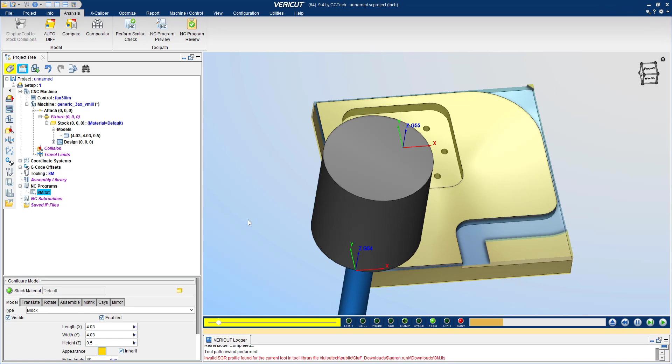Hi everyone, I'm Aaron Runk, and today what we're going to be doing is using our new Vericut software. This software is designed to take your part programs and check them to a model within your stock. So that way we can tell if our tool path and our tool setup will make a good part before we even get out to the machine.

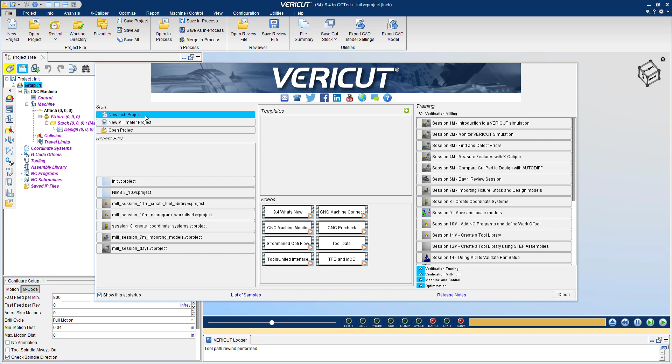So let's get started. First thing we're going to do when we open up our software is it's going to bring up this screen with some tutorials and a lot to select from. So it'll have a list of previously worked on projects, but we're going to go into new inch projects. So I'm going to click on that and it'll bring us to this blank screen where we can go from there. Now, we're going to go through and set up the majority of these settings so that we can see how our toolpath will look on our program.

So let's pay attention. On control and machine, when you get the software, you may have been given a library of control files and machine files. Well, I have a couple of them set off to the side so we can get through this quickly. I'm going to hit control and I can right click on it to open up a new one, or I can go to here to open up a new one. So I'll click down here.

When this opens up, I have put mine on the desktop. So I'm going to go to my desktop. It's on my Vericut. And then I'm going to go to my control files and my machine files. So right here, I'll click on control. I have a Fanuc 30i, and it puts it right in there. Same thing. I will right click on this one and go to open. And I'll do the same thing.

I'll go to my desktop, go to Vericut. I'll go to machine and I'll click on here. Now a second ago I double clicked on it. You can click on it once and hit open and it will do the same thing. And now I have a generic 3-axis mill. So we have that out of the way.

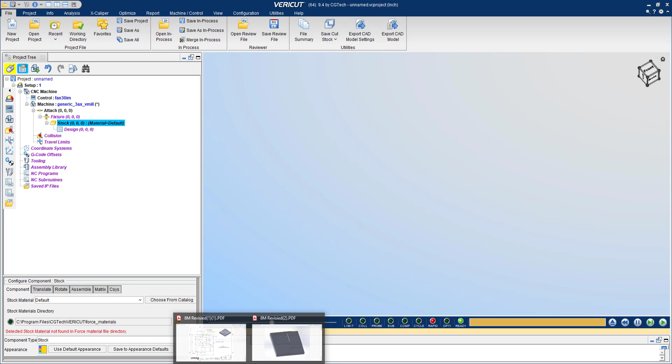I'm going to click on fixture. I'm not going to import a fixture right now. That's where I would put a vise into my simulation, but I'm just going to focus on the stock and the design. So on my stock, I'm going to have this print right here that I'm going to show you. So right here it says my material is 4 inches by 4 inch. Now I have a part program that I think will make this part correctly. That's what we're going to verify.

So I'm going to go set up my material for this right here. I'm going to go into stock. I'm going to come down here and I'm going to scroll down. I want to make sure under visibility it has both views. I'll come under model and I'm going to make a block. But right here, if you look, it's real small, so I'm going to zoom up on my block and then I'm going to give it 4 inches, tab, and then I'll give it 0.5 and I'll hit enter. I'll click off of it and you'll see that it brings in that color.

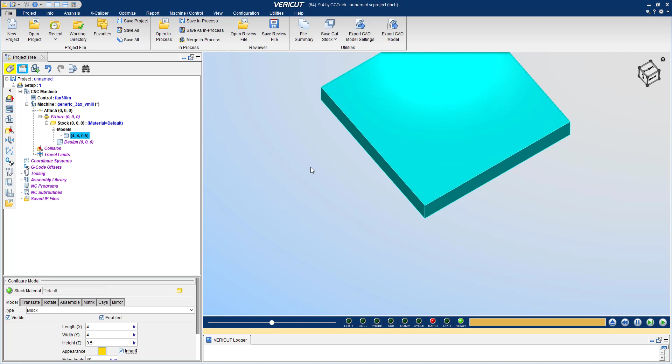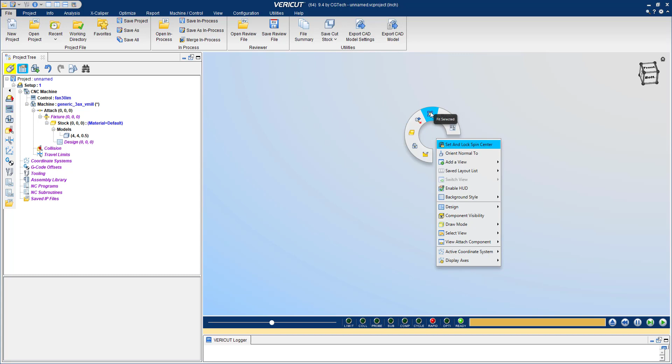Now get used to your controls. So my right click will move it around, left click and hold will rotate it. Those are your main functions right there, and of course scrolling up and down work that way as well. If you click and hold the middle mouse, it's going to scroll way up on that little view and your part's going to be lost. If that happens, we're going to right click, we're going to go to here to fit everything right there.

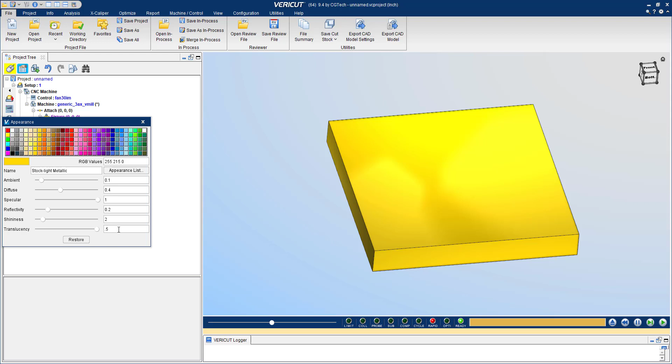Very good. So what I like to do is I like to make this translucent, so I'm going to right click on the material. I'm going to go to stock, appearance, and right here under translucent, you can scale it however you want it. I usually go 0.5 and hit enter. And then I will hit close. So from here, I've got my model brought in. I have the stock selected and so on and so forth. Now we can go further in depth on the stock material type and stuff like that. But for right now, I just want to see if my program will make a good part.

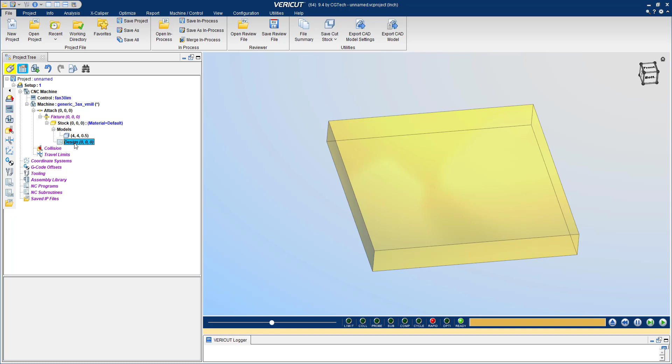So the next thing I'm going to do is I want to bring in my model. Now this model that I'm bringing in is a model that I created in SolidWorks. Now I saved it as a different type of file and I'll show you that in just a moment. So I'm going to click on design. I want to make sure it's visible in both views. It will default to invisible so you can keep bringing it in, but it won't show up. So I'm going to go to add model.

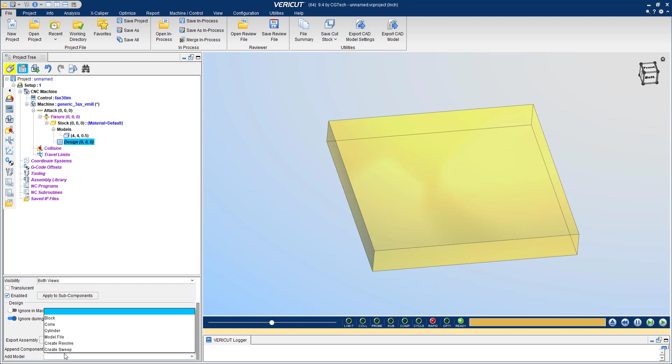I'm going to go model file, and then I'm going to go find that model file. Now I have put mine on the desktop under Vericut, and I have it in my 8M folder. Now, if you'll notice, this is a parasolid that I saved it in. Now, a lot of times, different files will work. You have to figure out which one your Vericut likes to use. So I'm going to click on that and hit OK.

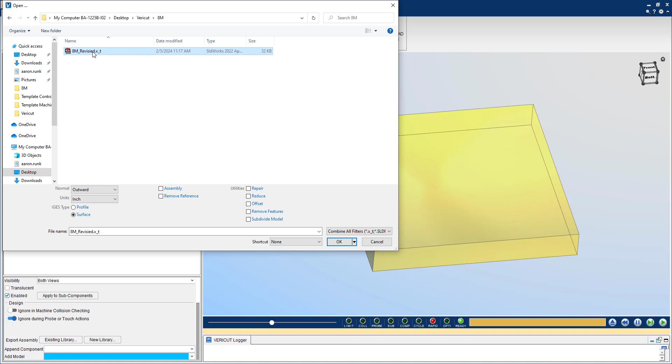And if you'll notice, it came in, but it came in at the wrong orientation. Now, this has everything to do with how you modeled it in the other software, the SolidWorks. But not to worry, we're going to rotate it, and I'll show you how. So with that highlighted, I'm going to go to Rotate. I'm going to rotate it by 90 degrees, but I'm going to figure out which way.

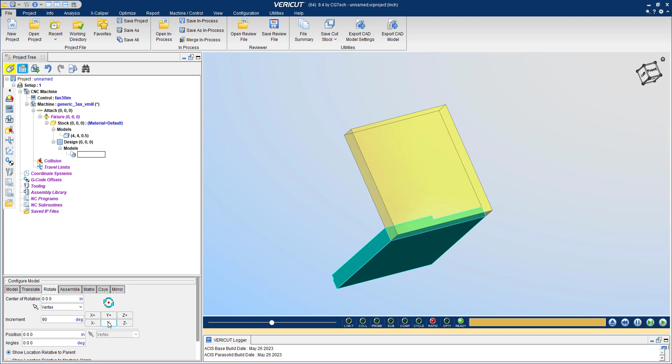So I'm going to click on Z first. That wasn't it, so I can come back and undo it. Is it going to be Y? It's not Y, so I can undo it. I'll hit X plus. That's what we're looking for. So I'm going to go ahead and leave that there.

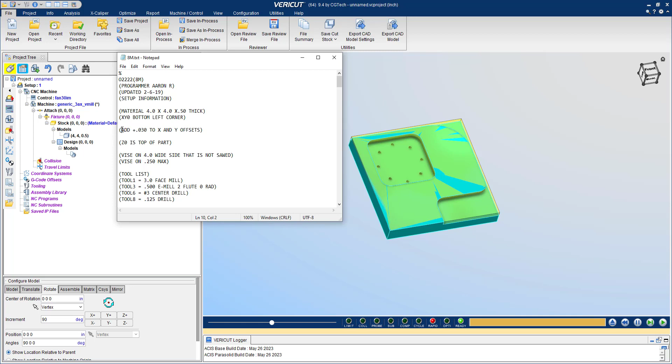So something I want to look at is I'm going to bring my program in over here, and I can see that my header says that the material is 4 inches by 4 inches by 1/2 inch thick. It tells me where the XY0 is. But what I'm looking for is this right here. This is going to affect me at this location right now. So my program is going to be shifted from the bottom left corner a positive .030 in X and in Y. So I need to move my model inside the material those distances for it to be correct.

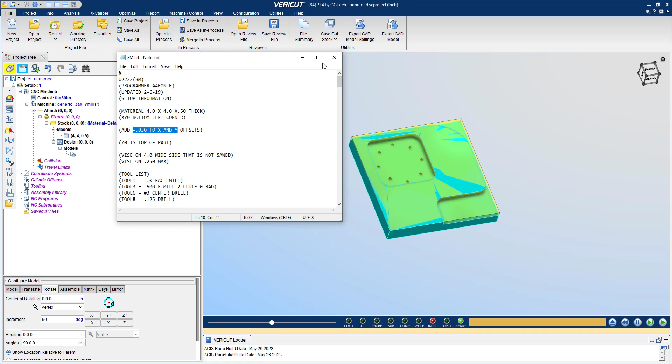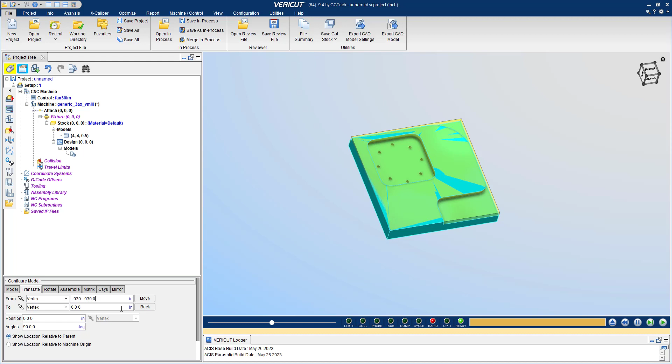So I'm going to pull this out of the way, and I'm going to go into Translate. Now, Translate is going to look a little weird. I'm going to click up here because I want to move it an incremental amount, but I'm going to move it in the negative. I'm going to hit space. I'm going to do negative again. That represents the Y, and this represents the X. I'll space again for Z. I don't want to move it in Z, so I'll simply put a 0. So when I hit move, if you watch it very carefully, you'll see that it did move.

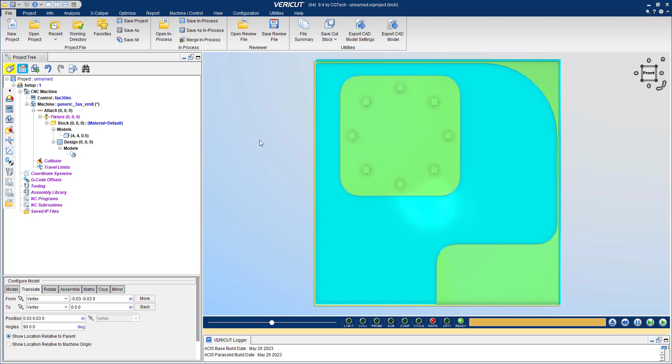Now notice the base of my part exceeds the model. So I'll show you something here in just a little bit on how to fix that. But what I'm looking for is for my part profile to be within the box, because I am only cutting the part profile in my program. So now I'm going to click off of it. I'm going to rotate it back up and center it.

The next thing I want to do is I want to start making my coordinate system. So this is all done. I will simply minimize that portion of my program. I'm going to go into my coordinate system, and I'm going to add a new one. Now this is called a Csys. You'll hear someone use that terminology. It's a coordinate system. So I'm going to add a new one, and then I'm going to go to Translate.

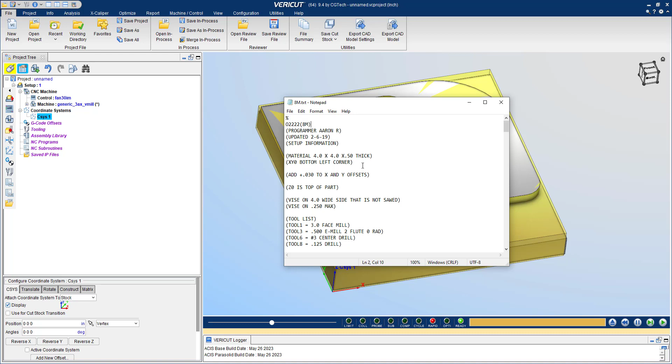It's going to default to a location on your part, but I want to put it in a certain location. I want to put it at the bottom left corner of my part, and Z0 is going to be the top of my part right here. So I'm going to translate it all at one time. So I'm going to come down here to Translate, and I'm going to position it at a vertex. I'm going to click on the arrow, and it wants me to pick it.

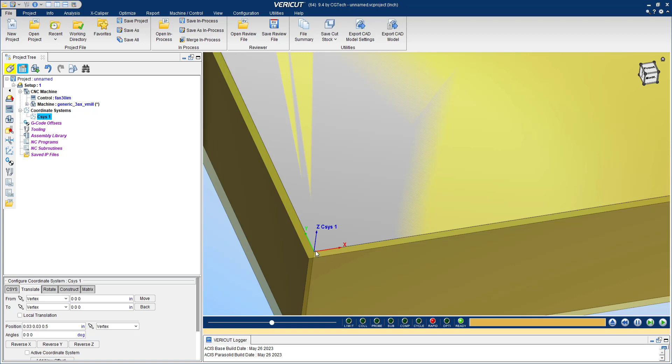Now you see my arrow jumping around. I can put it wherever, but I'm going to scroll up right here. Now I don't want to put it at the bottom left. I want to put it at the bottom left of my model. So you see I highlight it, and with it in this position I left click, and it does the rest for me. That works out very well. So now, this is where it's kind of confusing, but this has to happen. I'm going to rename it. This will help. G54.

All my programs will need a G-code offset that will align itself with the Csys that we just created. So under here, I'm going to name this G54, and I want to put my coordinate system in line with my G-code offset. So I will click on Csys number 1, and I will simply hit Add. You will see that this coordinate system is in line with Csys number 1.

But I wanted to rename it, and it didn't work. And I'll tell you why. When I go to rename, I type in G54, I must hit Enter. Once I do it, you'll see those two correct themselves.

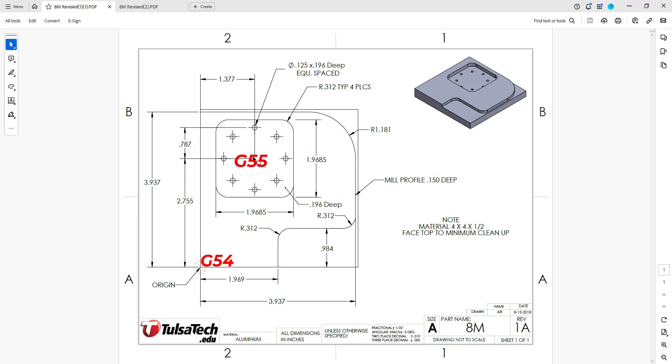So that works out really good. So we have this set up, but there's one extra step. On my part, I have an origin right here, but when I programmed my pocket, because I hand programmed it, I programmed it as if the center of my pocket was XY0. That's not a problem. So I will minimize this.

We'll go back up to my coordinate system, and I'm going to add a new one. Again, I will come down here to vertex. I'm going to put it in the same location as the other one. You'll notice that it has that 30 thousandths shift, just like the shift I made on my model. So I'm going to rename this one

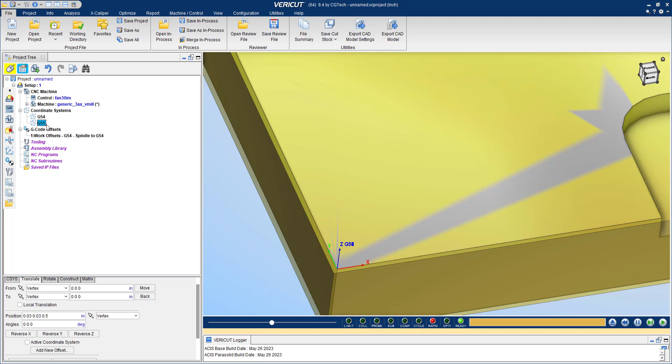G55 and hit enter. Now remember, if your program has a G55, this will work. If you have programmed your entire part using G54, I would not have to build the additional Csys. So now I have to translate this to the center of my pocket.

So if I pull up my print, you'll see that I have to move the X 1 inch 377 thousandths over. I'll have to move the Y 2 inches 755 thousandths up, and then I will translate it. Minus 1 inch 377 thousandths. I'll hit space for my Y coordinate. Minus 2 inches 755 thousandths, space, and then I'm going to put a 0 because I don't want to move

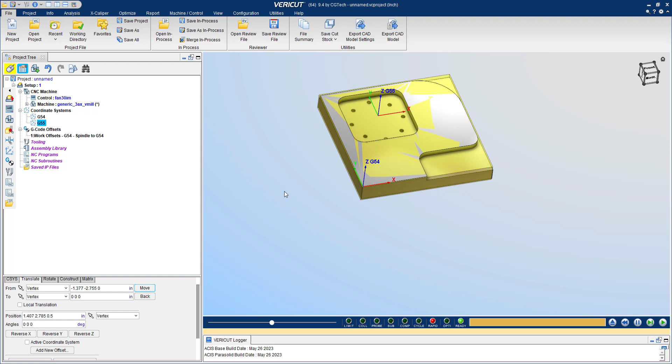it in Z. Now I'm using this as a negative because it's moving it that direction. If you do it as a positive, it will end up over here, in which case you can simply hit back and try again. So I'm going to hit move, and you can see that it moves up there.

And keep in mind, now that I've created a Csys, if my program is using a G55 work offset, I have to create a new one, and we'll call it G55. And I'll be using the G55 Csys for my location. You'll see it shows it right there. And then I'll hit add. So that all looks really good. We are actually moving pretty fast. So I'm going to go ahead and minimize my coordinate system and my G-code offsets.

Now we're going to go into our tooling. This is where we're going to need to pull up my program to see what tools I have here. So I have a 3-inch face mill, a 1/2 inch end mill with a 0 radius. I have a number 3 center drill and a 1/8 inch drill. So we're going to build these 4 tools, and if you'll notice, they're labeled 1, 3, 6, and 8.

Now what's important is in your program, what are they labeled? So this is labeled 1, and then it's labeled 2, and then my center drill is actually 3, and that's 4. So I can update it right here, no problem. 2, 3, 4. Just in case you want it for visual reference. But what's important is what the program's calling up. It's calling up G54 and then a T and an H. So I'll hit save so that it keeps my changes.

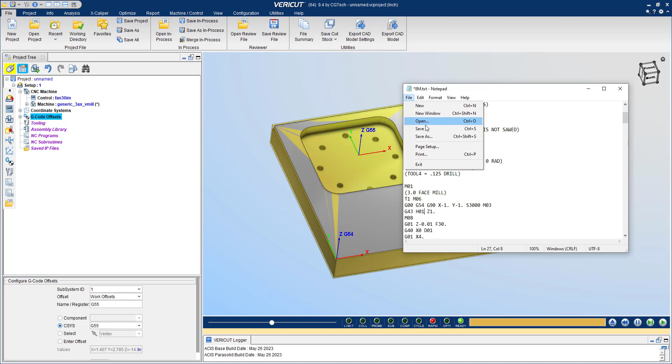And then let's go ahead and build these tools. So I'm going to go into tooling, and I'm going to hit tool library. Well, I don't have one built, so I can't load one. But if I had one built, I could simply go through and click on it. So we're going to build one, so I'm going to double click, and it's going to bring up my tool manager. So in here we have a lot of options to do things, but we don't want to spend a lot of time. We're trying to get this done.

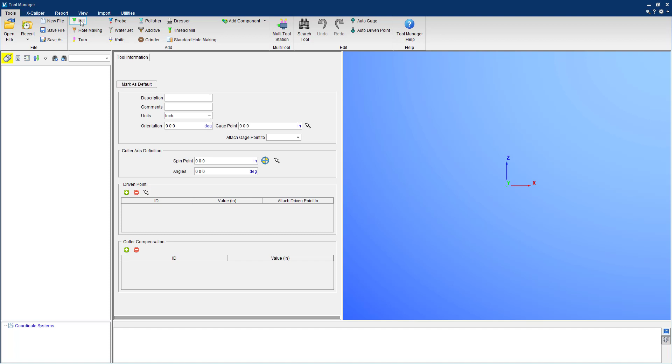So I'm going to go into mill because I want to make a milling tool. And then I'm going to go through and simply add some variables. So we said our first tool is going to be a 3-inch face mill. And I'm going to make the shank 2 inches just so it looks the same size as my holder. And then there's no radius on the end of it. So therefore I won't use this as anything else except for a flat bottom end mill.

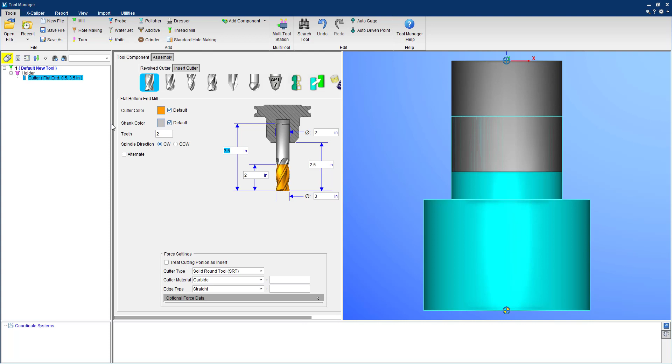But if I had a radius, I could click on it. If I had a tapered ball nose or if I had a bull nose, I could simply go through and add all these functions. So right here, that looks good. I have carbide inserts, so I'll leave this as carbide. When I click off of it, it will keep my settings.

So I'm going to come up here to default, and I'm going to rename this a 3-inch face mill. And the thing that's important is the first tool you make, the 1 and the driven point 1 will match. However, when we make our next tool, we need to make sure that those tools match, or else it will not work correctly in our simulation.

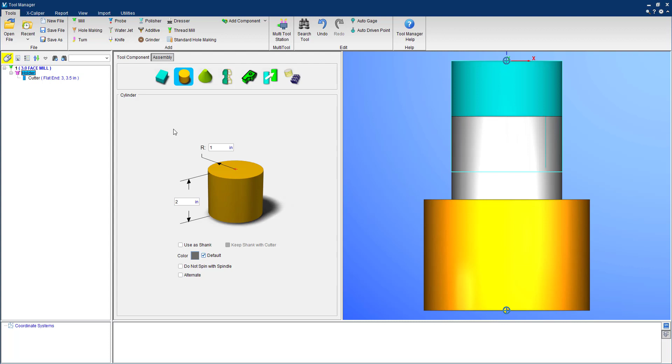Now, holder, you have the options of making just a generic holder, or if you have a DXF file of a holder that you can import, you can bring that in as well, or you can simply build one in the graphics window. Well, we're not going to go that far right now. We're just going to simply minimize tool number 1 because we're happy with what we have.

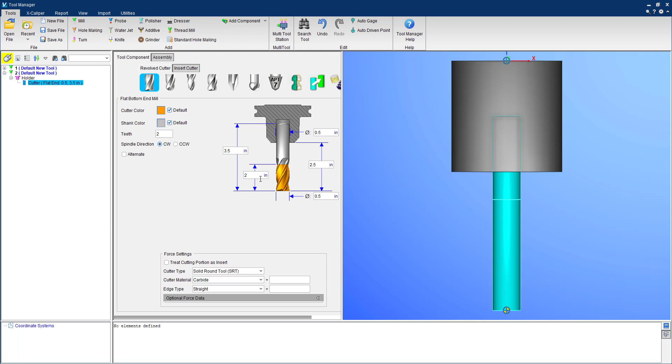So my next tool, as you can see, is a 1/2 inch end mill. So I'm going to click mill. The default setting was a 1/2 inch, and it has a 0 radius. So this actually came in exactly how we needed it. So I'll simply click on here and see how it says default tool. We notice it didn't take in my value because I forgot to hit enter. So 3 inches, face mill, and I have to hit enter.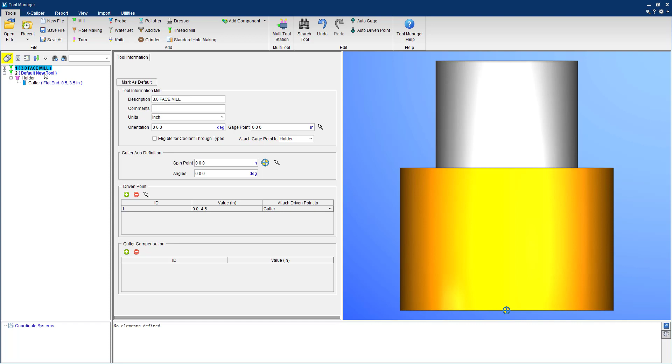So we'll do the same thing right here. I will come up to here and it will be a 1/2 inch high-speed steel end mill, and I'll hit enter. But notice my first tool was carbide. This one's going to be high-speed steel. So I'll come back to my cutter. I will come down here to the cutter material and change to high-speed steel, and I will hit enter.

So before we close this out, remember I want my 2 and my ID to match. So think of it as this is the T number, this is the H number. I want them to match. So I'm going to click right here. I'll click one more time, 2, enter. And then that way it will look correctly in my simulation.

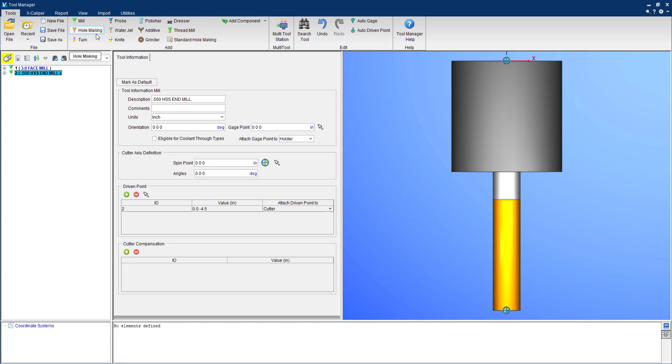The next thing I want to do is I want to make a hole. So I'm going to make a center drill using hole making. The cutter will come up and it will have these options for a drill, a reamer, a center drill, or a tap. Well, we're going to use a center drill, and I believe the default size is a number 4, but my hole diameter is an 1/8, so I can't do that. So a number 3 center drill has an 1/8 inch diameter, so I'll type that in and push enter. And you'll notice that my graphics changed.

So as well on the diameter, I believe it's a 3/8 diameter, so I simply type it in and hit enter. And if you need to extend this tool out of the holder or retract it, you can control it with these graphics right here. Now again, this is a center drill, which is high-speed steel. I'm going to go to cutter material and select high-speed steel.

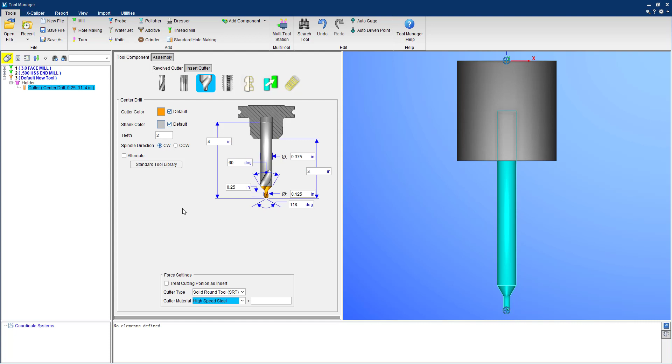I'll come back up to my holder. I'll type in number 3 center drill and hit enter, and then my ID number has to match my tool number. So 3, enter, and then I'll simply close it. We're almost done. We have one more tool to make.

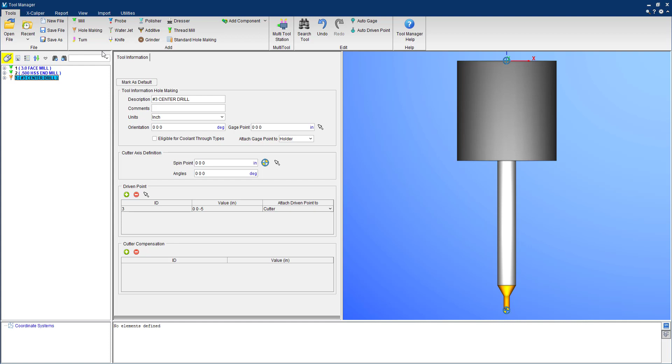I'll go into hole making. I will come up here to drill. I'm going to type in an 1/8 of an inch and hit enter, and I'll just leave it just like that. It's really long, but it's okay. So I'll come back up to my cutter material, high-speed steel. If you have a carbide drill, you can just leave it as carbide or a ceramic or cobalt.

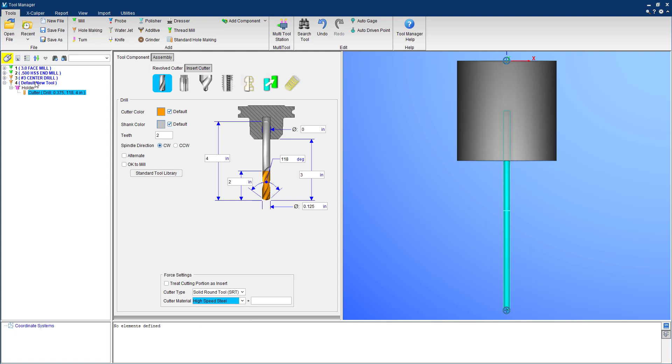So I'll come up here to description, and we're going to call this an 1/8 inch drill, and I'll hit enter, and I want my 4 to match my ID. So I'll click down here and type in 4 and enter. So this is really good. This is all done. Now before I close this, I need to save it so that if my software decides to crash, I know where that's at.

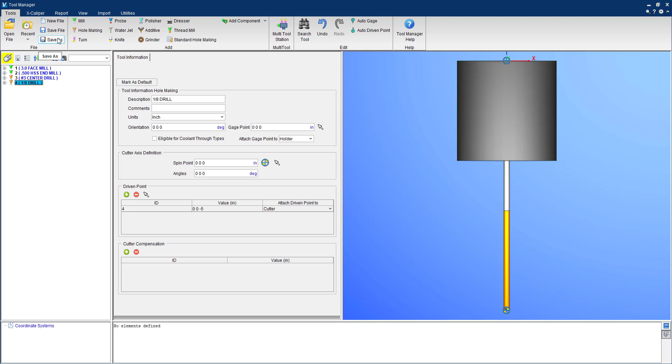So I'm just going to do a generic save. I'm just going to save under downloads. It saves it as a TLS, and I'll call it 8M. And then I'll just click over here and hit save. So this works out good. So I'm going to hit exit. And now I've got my tooling. Now that's going to take you the majority of the time, is just building your tools.

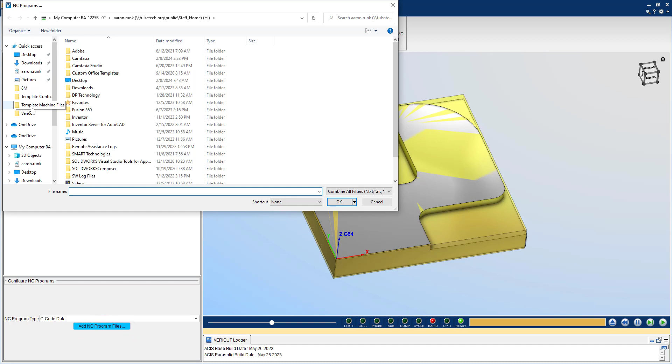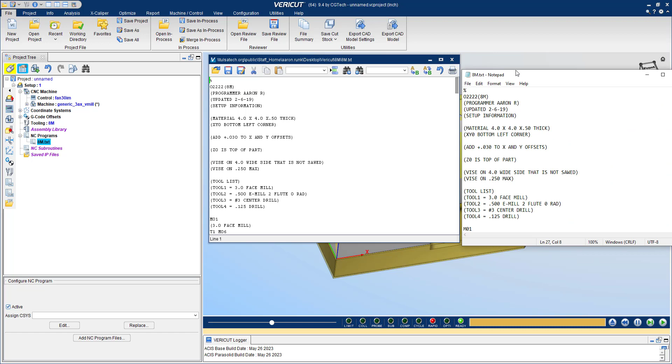So here's where it gets pretty easy. All I need is my program. So on my program, I'm going to go to add program files. Now mine is going to be under Vericut, under the 8M, under that text document. So this text document that we're grabbing is this one right here. So I'll hit OK. And it came in right there. So if I double click, you'll see that everything did come in just as it shows here. So I'm going to exit that.

Now right here, if I hit play, it's going to go really fast. So I'm going to slow it down just a little bit, and it will still go pretty fast. And I'm going to hit play. Now is where we want to see if our program is going to work. So I'll hit play.

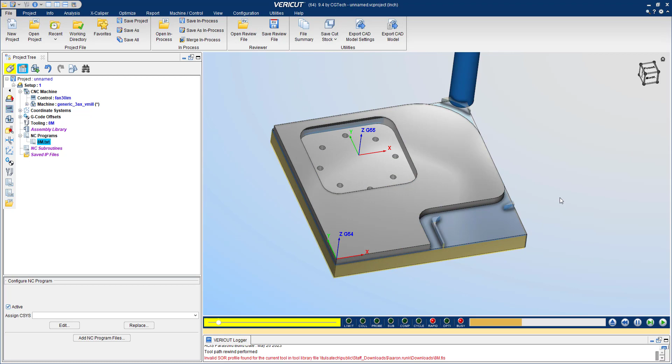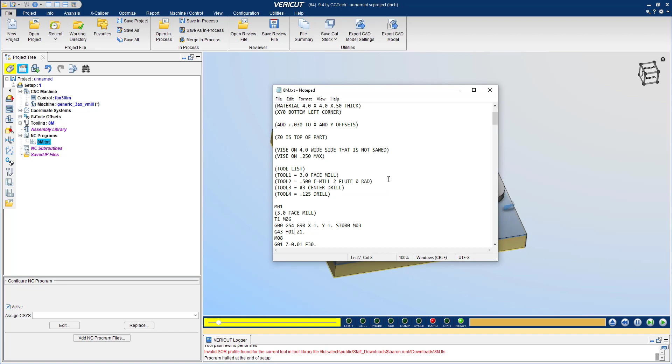And I see some things already that don't look right. So I have all these islands right here. Now my program, if you'll notice, uses cutter comp. So I have to make sure that my software over here is set up to use cutter comp. So I'm going to hit eject real quick. I do want to reset the simulation.

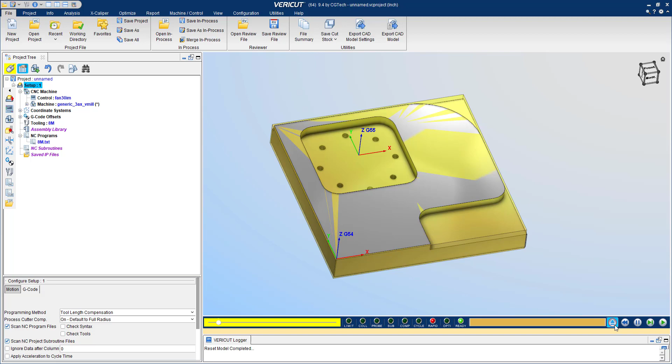I'm going to go under setup. Under G code, it says cutter comp is off. So I'm going to click the drop down menu and go to default to full radius, and I will click OK. Because we hand programmed it, we have our cutter comp. This will allow cutter comp to work. I will simply hit play again, or I like to hit eject just because. I'm going to hit play again and see what it does.

Very cool. So it took into consideration what my cutter comp was. Looking at this, it looks to be right. It's cutting on the front of my part, it's cutting on the side of my part, and that's the reason why I put the 30 thousandths in there. So if you look right here, this is what my part should look like when it's done. Now if I had not shifted my 30 thousandths, when I run this on the machine it would look like this. It would not have any cleanup. So I definitely want this to show, which is exactly what it shows right here.

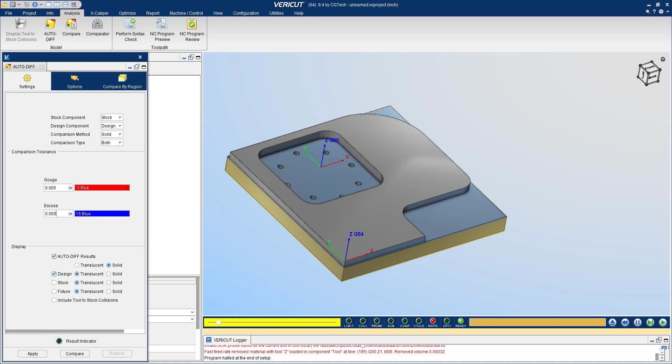So that's good. Now the last thing I've got to do to make sure that nothing is out of tolerance to the model is I'm going to go up here, then come up to my auto diff, and it's going to give me my options. So right now, if it is gouging into the model by more than 5 thousandths, it will show up red. If it has excess material more than 5 thousandths, it will show up blue. With the majority of my tolerances being plus or minus 5, I like to keep it just a little bit lower, but if we needed to, we could simply change it right there and hit apply. Now I'm going to hit compare.

Now if you notice, I've got some weird things going on right here. When I look at this, I've got red on the top, red on the side, red on the top of the part, and at the bottom of my holes. So this is why it's always good to run in Vericut before we take it out to the machine, because it may look good in a 2.5D simulator, but we want to see everything as it compares to our model.

So I'm going to look at my program and see what's happening. Z0 will tackle the biggest part first. It's supposed to be the top of my part. When I look at my program, Z0 is the top of my part, which means my face mill should be going across the part at Z0. So if I scroll down, you'll see my face mill. There it is. It's actually going down 10 thousandths instead of being at Z0 like it's supposed to.

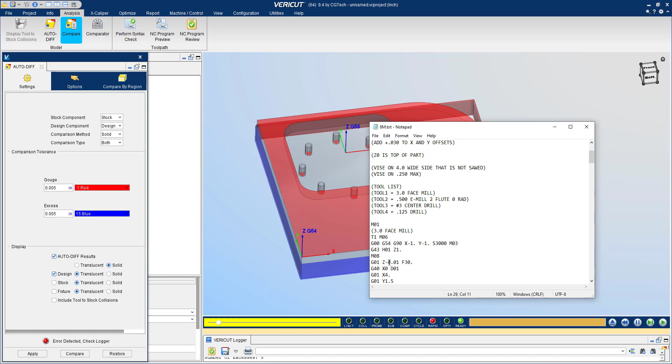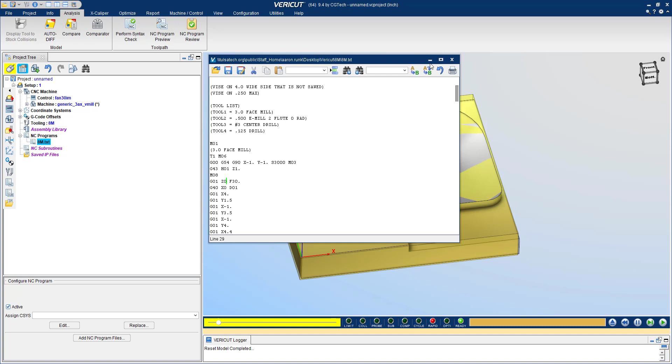So I'll move this out of the way. I'll cancel this for just a moment. I'm going to go ahead and hit eject and look at my part. Now right here, I'm going to see that I have that right there, and I'm going to simply type in a 0 and save it. I'm going to close it and we're going to do nothing but rerun it. You can see that it completes my pockets, and the holes look good.

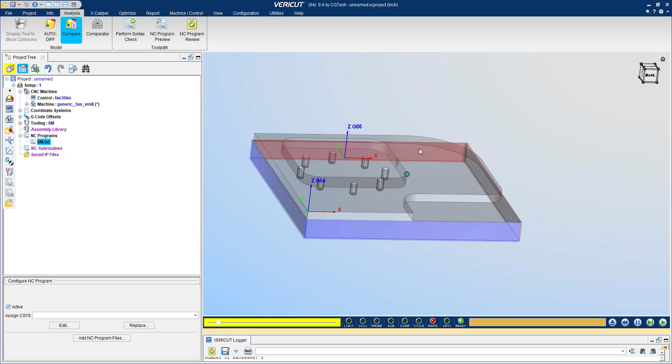I'm simply going to go up to compare this time because we already have the settings set. So I'll hit compare and you can see the face of my part is correct now. That looks good. But I've got a couple other things going on here. I've got a little move right here that I don't like. And I have this excess material that isn't being cut, but it's being left. So it feels like it's cutting it because it's not within the model.

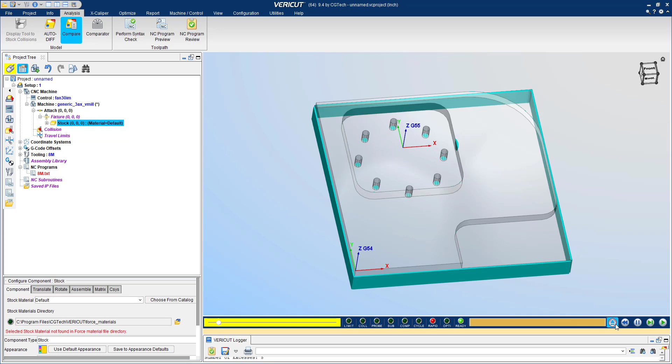Well, that's easy. I'm going to come back up here to my machine, go into my attachments, and go back into my stock. Now remember, I'm going to hit eject to help us get back out of that simulation. So right here, I'm going to click open and go into my models.

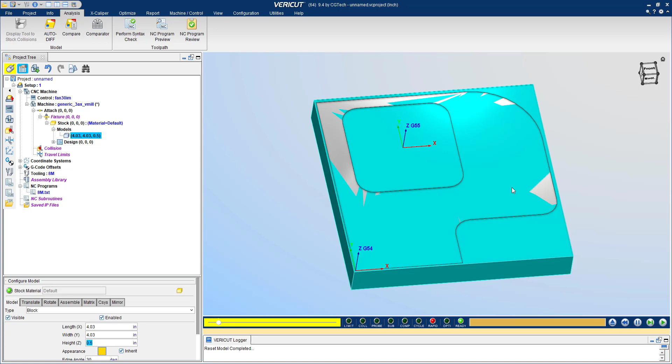Now my block is 4 inches by 4 inches, but remember my model has been moved. So if you wanted to make it look better, just visually pleasing, we're going to have to go into our model and make it a little bit bigger. So if I moved 30 thousandths, I will go ahead and make my block 30 thousandths bigger as well. I'll hit enter. So now my block matches my model, and I'm simply going to hit play again.

And that's all we're doing right now, is we're just troubleshooting. So once this gets done drilling, I will come up to compare, and you will see that this looks pretty good. I've got that taken care of.

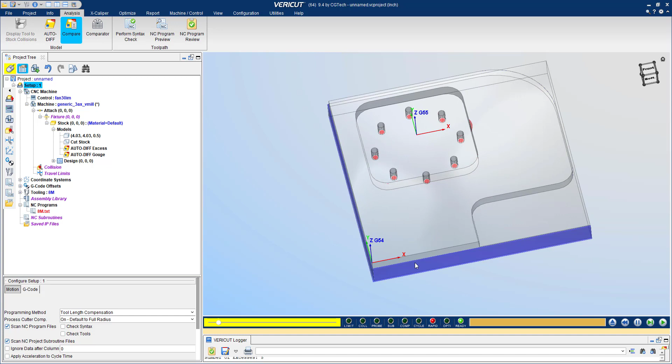I've got the blue on this side because it's still 30 thousandths heavy, which I'm not too worried about. If you needed to, we could move the model as well, but I'm not too worried about that right there. I'm more worried about the gouging that I have going on right here.

Here's something cool. We're going to move that up, and you can see I've got a lot of information right here as to what it thinks is gouging and what tool it is. If I look down here, I have 9 gouges, but my first gouge is happening at line 195. Now I want to open up my program, and I don't have N numbers, so it's kind of hard to find line 195.

Well, that's what this little block search is for. I'm going to type in 195 and search for that line because that's where my gouge is happening. So if you'll notice, right here I have a G40, but it's canceling while it's right next to the wall. So it's actually moving into the wall on this G40.

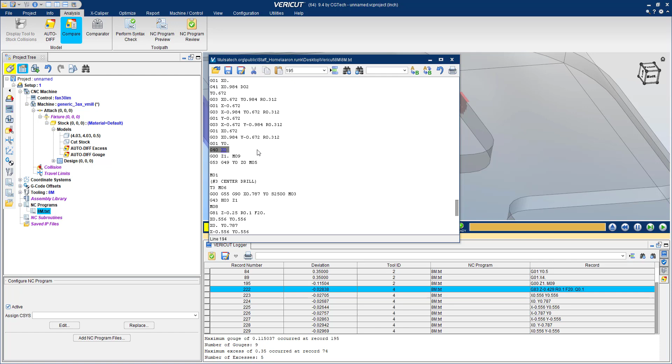So I'm simply going to type in an X0, because that's where I was when I started cutting the pocket. That's where I'm going to end when I turn off my cutter comp. I'll hit save, I'll exit this out, we'll lower this back down, eject, and simply hit play again.

So you don't see it very much when it's running because it's hard to see. That's why the compare file shows us everything we need. That looks really good. So my tool, instead of canceling cutter comp right here next to the wall, it moved back to center while canceling and did not go into my wall right here.

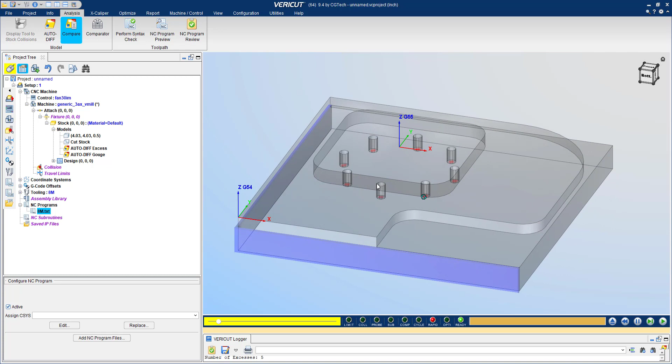Now the last thing I got to look at, and this is going to be interesting: every single one of these holes is going too deep. Now when you're modeling your parts, if I scroll up, you'll notice it looks like the drill tip on each hole is what's going too deep.

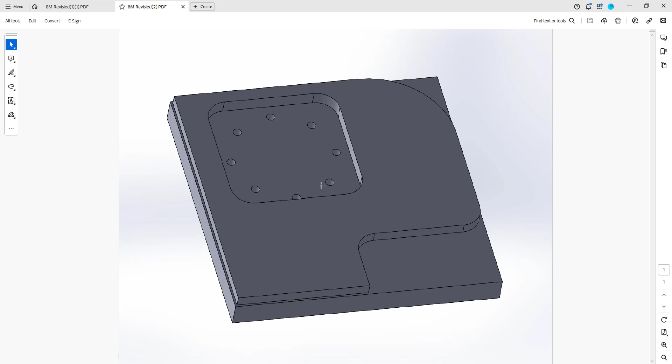Now when I modeled this part, I'll show you, these holes do not have a drill tip angle on them. They are just a flat bottom hole, and they're programmed to the right depth, but because my drill has a drill point on it, that is what's exceeding my model, which is going to be just fine.

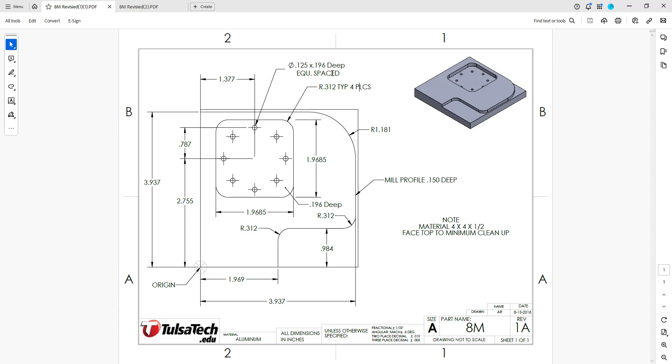Because if I look at my blueprint, you'll notice it wants my diameter of 1/8 of an inch to be that deep. So I have it modeled that deep, and my drill point has to go deeper so that the diameter of the drill is that deep. So this right here looks good.

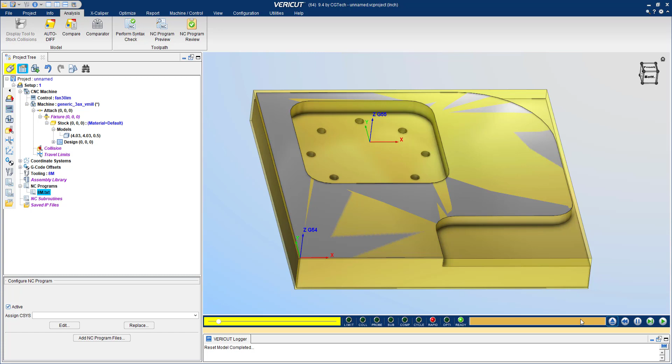And if you wanted to fix it for visual purposes, I could simply go back into my tool library and tell it that that tool was an end mill, or I could say that there's a flat bottom drill. There's multiple ways you can do it, but ideally this is what you're looking for when you are all done.

So once you have what you like, if you make an edit or need to come back to it later, I'm going to go to File, because we just did a lot. We don't want to lose anything that we just did. So I'm going to go to File, then Save As or Save All, since it's the first time we did it. I like to go Save As.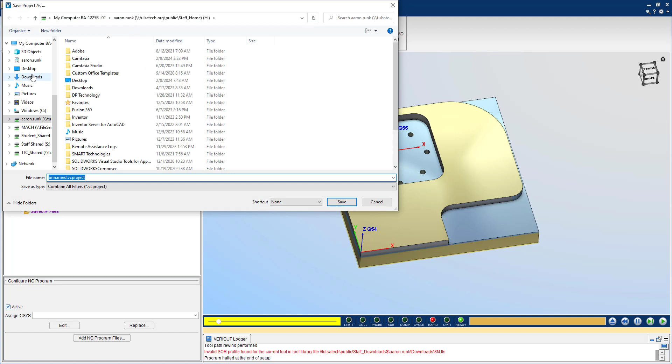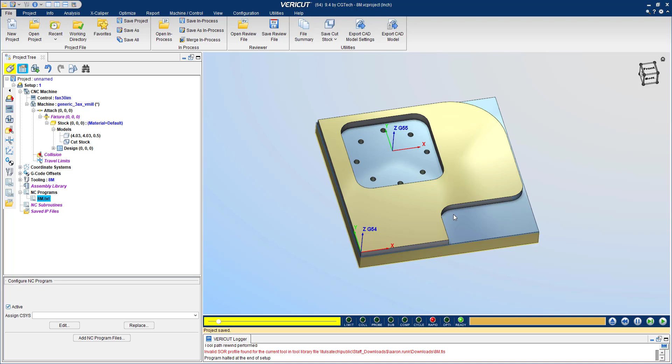I'm just going to put this in my downloads, or better yet, let's put it in my Vericut. So I'm going to click on 8M. It's in my Vericut, in the 8M file, which had my program in it. I'll go ahead and name it 8M, then simply hit Save. And if you look up here at the top, my project is now saved as 8M. So if I ever want to come back and look at this, I can simply open that up, and everything that we just did is still there.

All right, so with that, we have successfully gone through and set up our Vericut software to run our program over our stock and verify our program is making a good part to our model. So the good news is, now that we've gone through and verified our program and everything looks good, we are now safe to go out to that machine and start setting it up, knowing that we have a good part program.